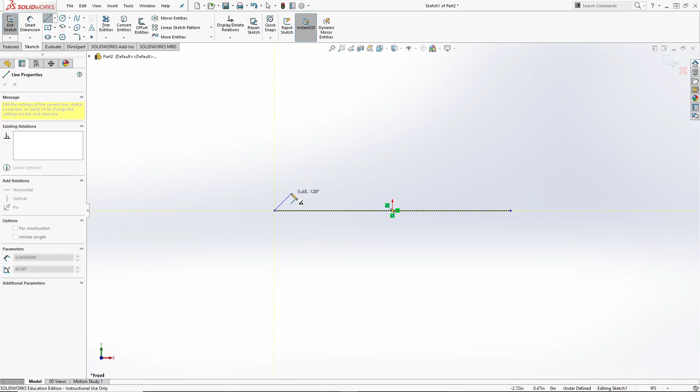Then from there, I'm going to draw a new line coming up at a 45-degree angle. You know the line is 45 degrees if it has that little white symbol, and it will also say 135. I'm going to go about here-ish, move my mouse over, then come up, then over like that.

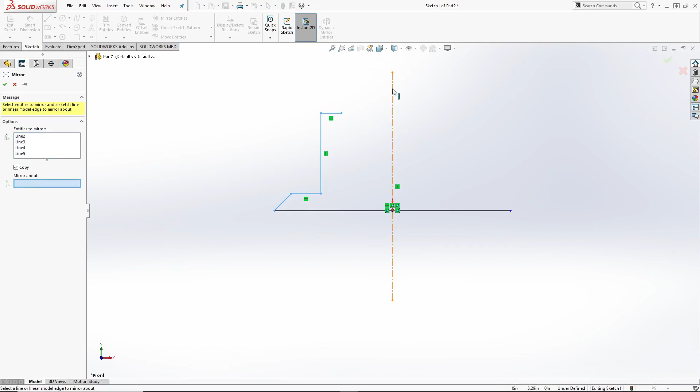I'll then make a center line going in the middle. As long as it lines up with that origin, it's fine—you don't have to start it exactly on it. I made mine go below a little bit. I'm going to select all these lines, choose Mirror Entities at the top, click Mirror About, choose my center line that I just created to mirror it on the other side, and hit the green check mark.

Then I'm going to make a circle right here. I'm going to start it right there and end it right there, and use the trim tool to trim the top. That's the first face that I'm going to extrude back.

Now I have to define it. If lines are blue, that means they're undefined. If they're black, that means they're defined.

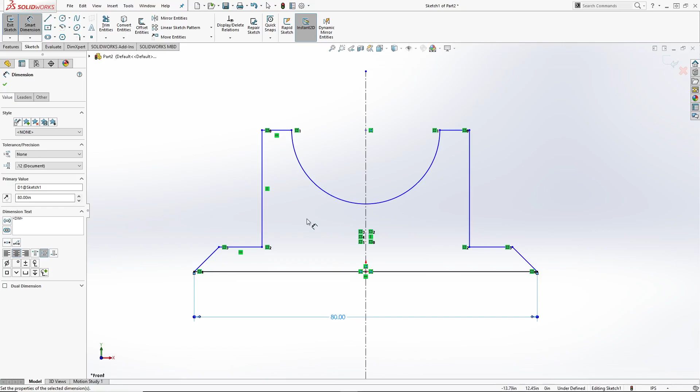First, I'm going to use the Smart Dimension tool and make this bottom length down here 80. That should change everything—it scales your whole drawing based off that one dimension, so now that's 80.

The height of my shape should be 40, so I'm going to set that to 40. This needs to stay in line with this though, so I'm going to just click and drag that up like that—if yours does that, just fix it that way. Then I'll do Smart Dimension from here to here and make sure that angle's set to 45, same on the other side, 45.

If you get this error, it's because we mirrored it, so whatever the properties of the one on the left are, it's going to take on those properties on the one on the right. So I'll just hit cancel for that.

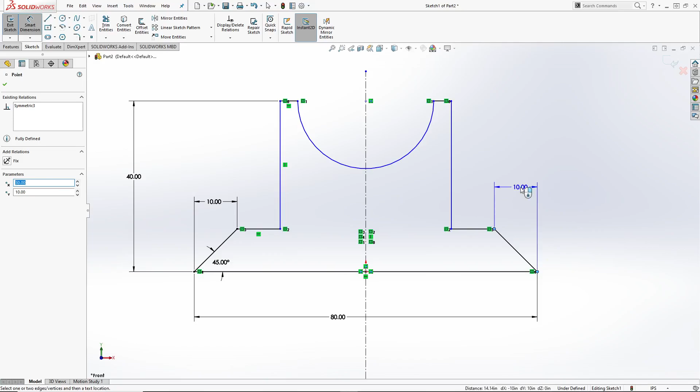There's a dimension that I need from here to here that is 10. Since that happened on the other side, it should already be 10 there, so I don't have to put that dimension on. Then the radius of this circle is going to be 10. These are going to be 10, 10—that one's already 10.

It should stay centered. Since I've got some stuff that's blue, let me undo that. The last dimension should be from this blue line to this blue line, and that should say 40. Then everything should turn black with those dimensions added, meaning it's fully defined.

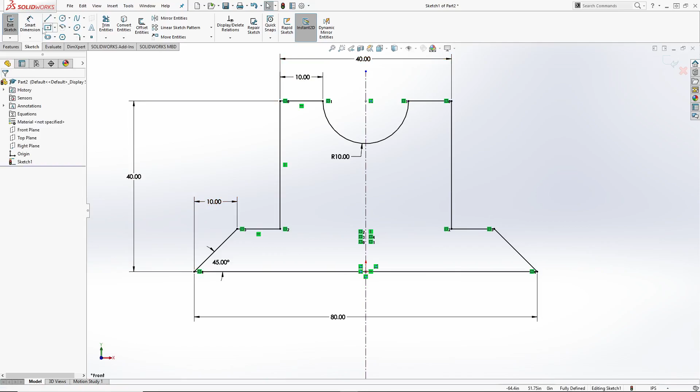So then I'm going to exit sketch and go to features, hit Control 7 on the keyboard to get to an isometric view. Click extrude up here and type in 30 because I want to extrude this 30. I always like extruding back, so I'm going to change this direction so that it's extruding back and to the right.

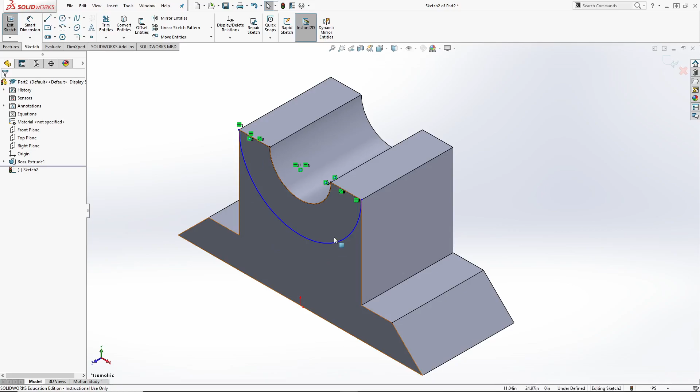Hit the check mark, and that's the front face or the main face. Now I'm going to do this front shape that kind of comes out. So I'll hit sketch, click on the front face that I've already created, and then trace this circle, and there's another circle here, draw a line going through, then trim the top and middle of that so it just looks like that. And I'm going to extrude that out 10. And that's the shape. So I'll do a save.

I've already got this saved actually, so what you should do is hit save as, call it 1.1, save it on your OneDrive, and then I'll close this. And then you're going to open up your title block.

I'm going to right click, go to edit sheet format, call this Solidworks. I think it's just problem 1.1. Slide it down. I think it's actually part, not problem. Part 1.1.

Change drafting to whatever level drafting you're in, change name, date, period, all that stuff, and then right click and go back to edit sheet. That'll get you out of that edit mode.

Then up here I'm going to go to model view, browse for my file. Mine I put on my desktop. You guys should be in your OneDrive though.

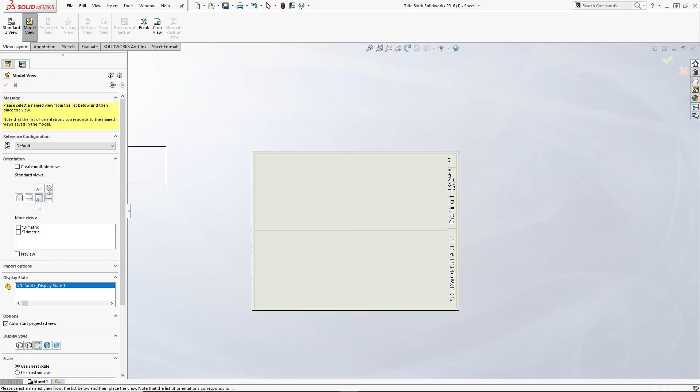Change this view to isometric and then just click the box up there. If you want to make it larger, you can go to use custom scale and change this number 1 to something like 20. And then you can do 3 standard view. Double click the same thing and it'll give you 3 different views.

You can select them. I wonder if I can select all of them at the same time. Yeah, so you can hold control to select all 3 of them. Use custom scale, you can do 1 to 20, that'll make it a little bit bigger. Let's try 24. That looks pretty good. And then you can just slide these around to get them visually centered. Slide this down. They're all kind of locked together.

And then go to the annotation tool. We're going to add some dimensions. So you do smart dimension. Looks like we need one... actually, that's the wrong spot.

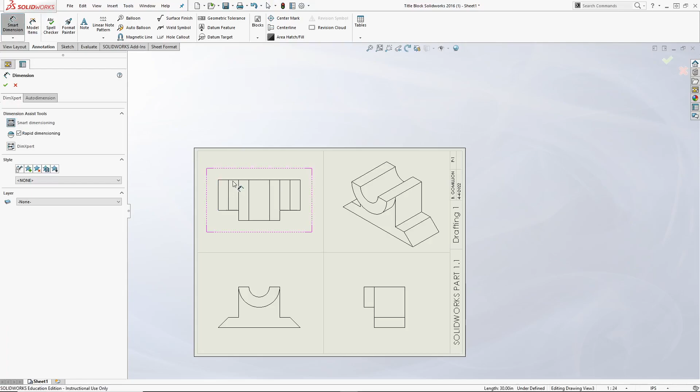One from the back to the front is 40. This front line is also 40. Let's zoom in. This bottom line is 80. Distance from this point to this point is 10.

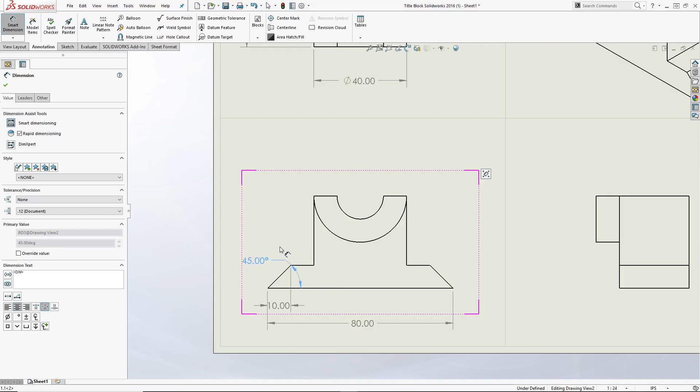This point to this point... there we go, is 10. This angle here to here is 45. I have to bring it in. I've got a radius of 10. Distance from here to here is 40.

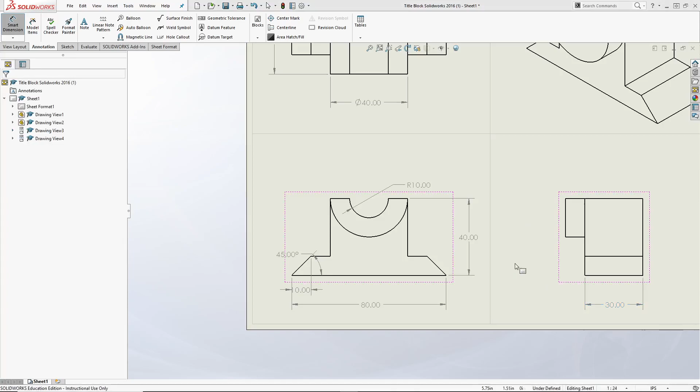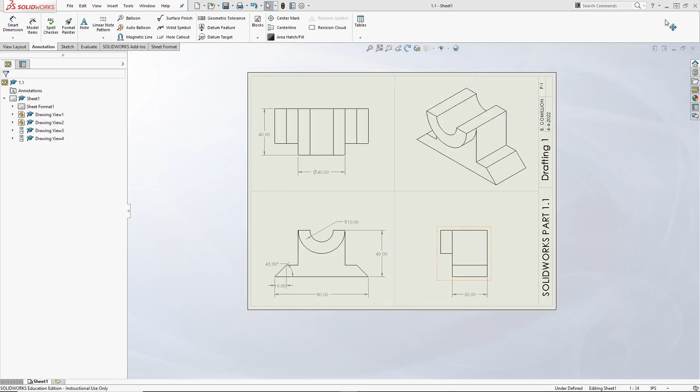This one is 30, make it line up with that if I can. I think that's it. Once you have that, first I would save it as a drawing. So just call it 1.1, save. And then in order to turn it in on Canvas, you have to do a save as and save it as a PDF. 1.1, hit save, and it should automatically save.